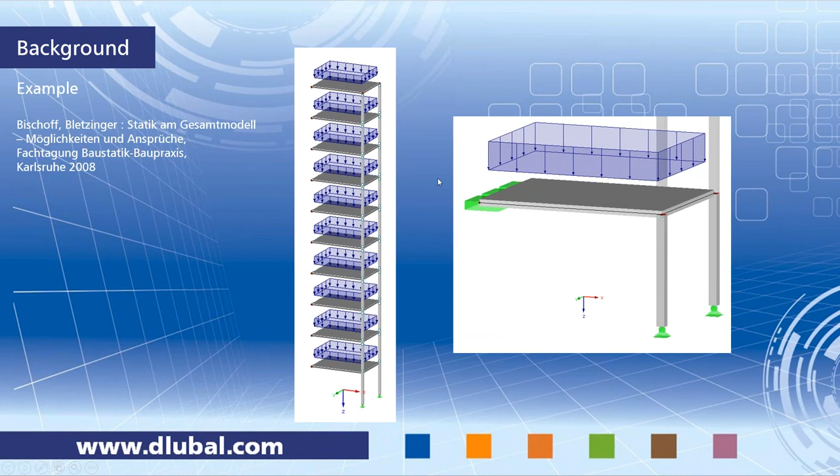If you would calculate this model in RFEM as the whole model, it will look like the left graphic, and there you can see construction stages are not taken into account. There's just one calculation for the whole building, all 10 stories calculated in just one step with all the 10 surface loads.

In the graphic of deformations you can see the deformations increasing toward the top of the building. That means minimum deformation at the bottom, maximum at the top shown in red. This is like a hang-up effect of the ceiling surfaces, an addition of deformation from bottom to top, and you'll find the maximum bending moment and maximum deformation on top.

The question is: does that calculation represent the real behavior of the build-up process, the real behavior of the structure? It's clear that the whole building with 10 stories is not built in one second or one step; it will be built story by story. So the problem is that this staged construction is not part of the whole calculation, and this leads to wrong results.

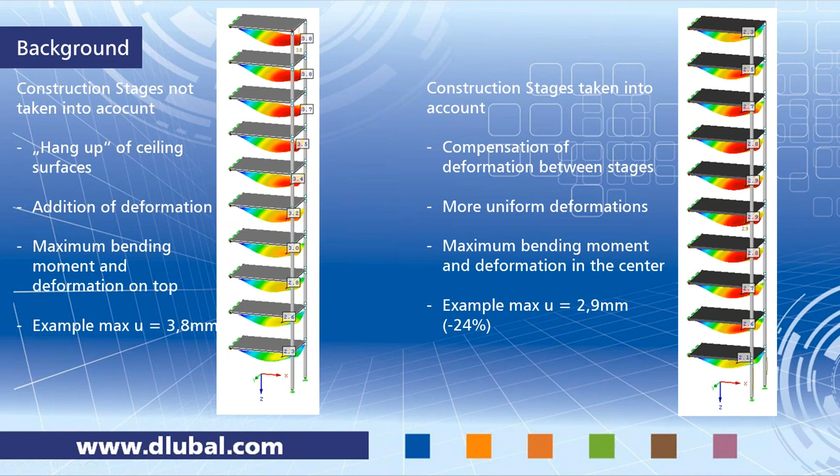So with this information about the construction stages calculation, we want to take a look at the features of RF-STAGES in the next slide. What are the features of RF-STAGES?

Of course, you can add or remove elements. As I did in the example of the high-rise building, you can add columns, surfaces, and even solid elements in several stages. You can remove them, like temporary columns, in the first stage or second, whatever. You can remove these, or you can even modify elements.

You can modify materials, hinges, and even supports.

You can also take nonlinear elements into account, meaning you can follow tension elements and compression elements. This is because the several stages are calculated by Newton-Raphson, and for a combination in a specific stage, you can use temporary loads.

That's the next point in this slide. What does it mean? For example, you have a temporary load like a crane or something in stage number 2, representing construction workers or a construction truck maybe, and you want to inspect a combination of different positions of this load. So this is what you can do with temporary loads, and these are acting only in that stage and not in a following stage.

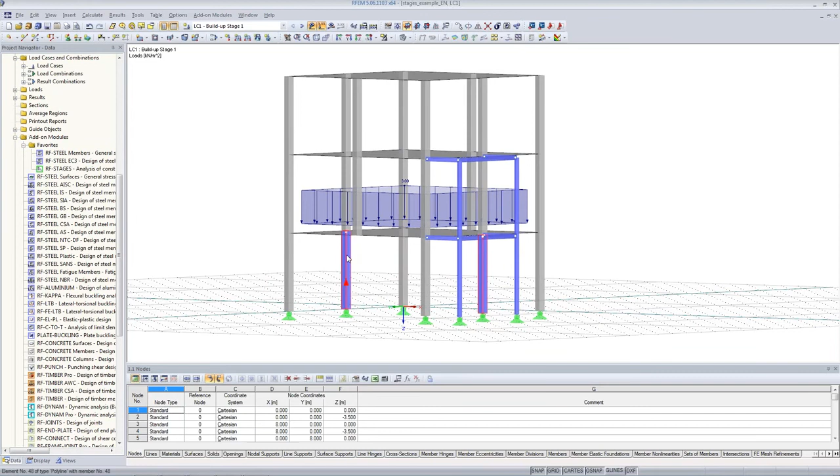So with these features, we want to move over to RFEM, where I've already created a small model for today's webinar. We have a small building, concrete and steel, with 3 surfaces, a lot of concrete columns, and also temporary columns - two steel columns and a small temporary platform.

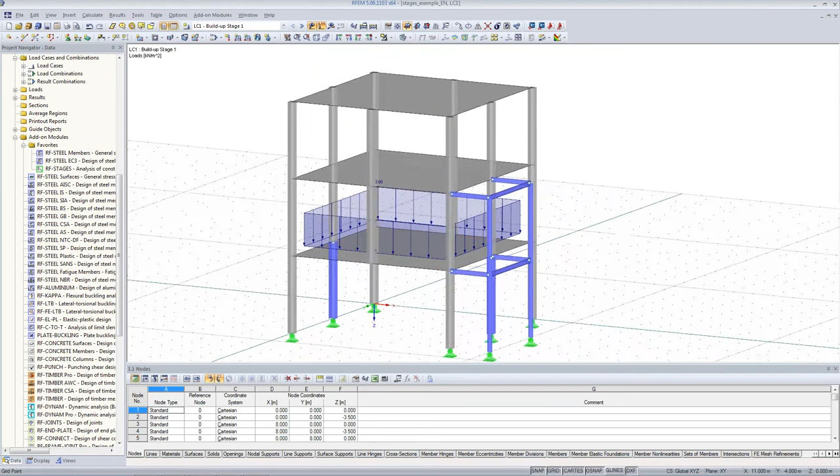I already created the load cases, meaning we have build-up loads for stage 1, stage 2, and stage 3. As you can see, it's important to split up the loads for the stages calculation. So I want to prepare 3 stages: the first stage is the bottom of the building, the next stage will be added in stage 2, and then the final stage where I want to remove the temporary frame over there.

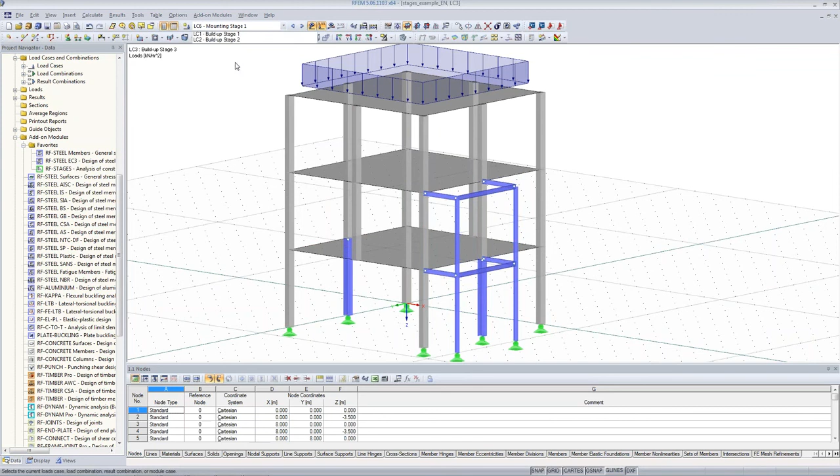In the second stage, I will already remove these two temporary columns. So it's important to split up the loads - this is built up for stage 1, stage 2, and stage 3. We also have mounting loads, which are the temporary loads on our platform.

So right now we want to start with the module RF-STAGES.

By double-clicking on this module, you will find general data, which is used to define the stages. We have 3 stages over there. You can write down a description, or you can use a template like construction stage 1, 2, and stage 3.

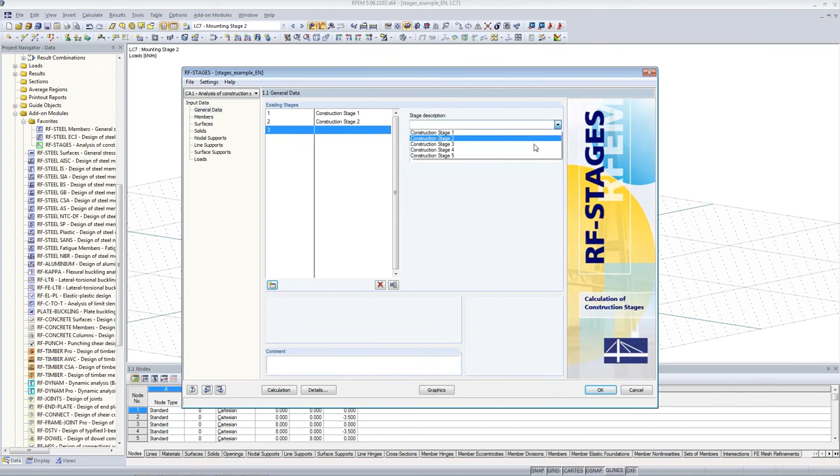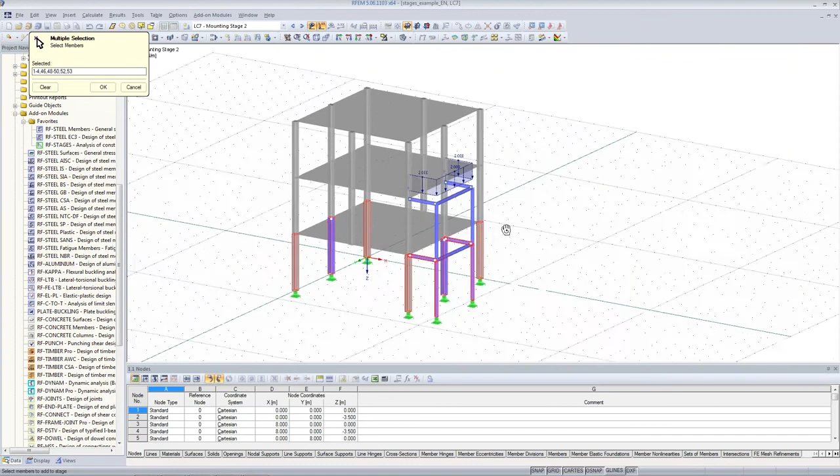Then we can go on to the members dialog, where you have to add the members which will be added, removed, or modified in the particular stage. In stage 1, of course, you cannot modify, delete, or remove something because there's no stage before stage 1. So we will start to add something, and these are all the columns, and the horizontal steel beams.

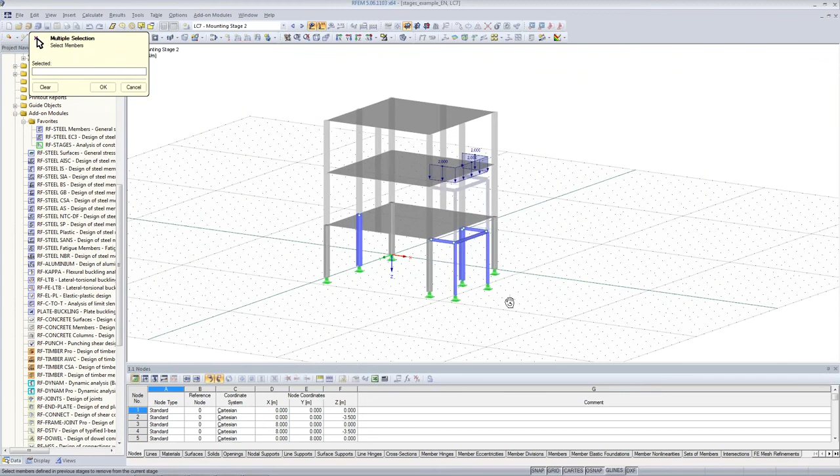In the next stage, we want to add not these columns, but these members, and we want to remove the 2 temporary columns at the bottom of the building. In the last stage, we build up the concrete columns in the 3rd floor and remove the temporary frame. As you can see in the graphic, you can follow the selection in the RFEM background. So construction stage 1, 2, and 3.

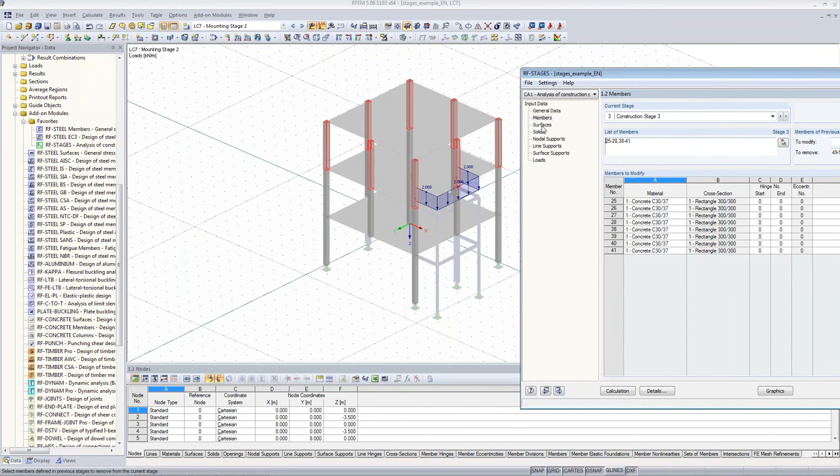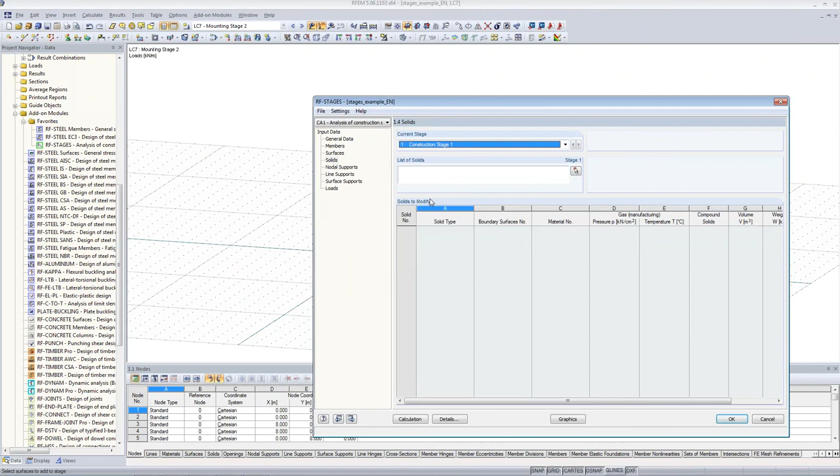Now we want to add the surfaces. That's quite easy: stage 1, surface 1; stage 2, surface number 2; and in the last stage, the roof surface. We don't have any solids in this model, so we can go on to the Nodal Supports.

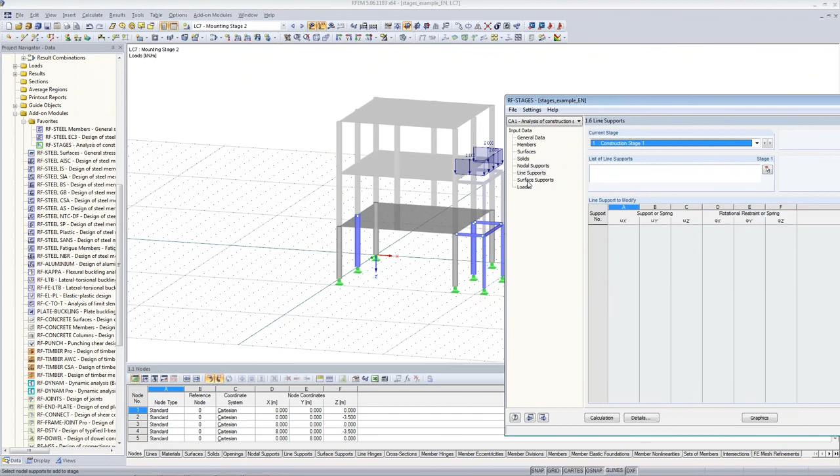We will just select all of them. We don't have to remove the Nodal Supports because the member, these intermediate temporary columns, will be removed, so there will be no load left to this one, and we can just leave it as it is for all the stages. We don't have any line supports or surface supports, so we can just go on to the loads.

In our stages, it is possible, as you can see in this mask, to add permanent or temporary loads. The permanent loads are, for example, self-weight, or any kind of load case or load combination which should be taken into account in every stage. So it is a constant load for all the stages, like build-up loads and live loads.

In this example, I created load combinations for the several stages, and you can also use load cases or load combinations, or you can even use them together. So in stage 1, I prepared load combination number 1, so I can add this. Stage 2 has its loading combination, and stage number 3 as well.

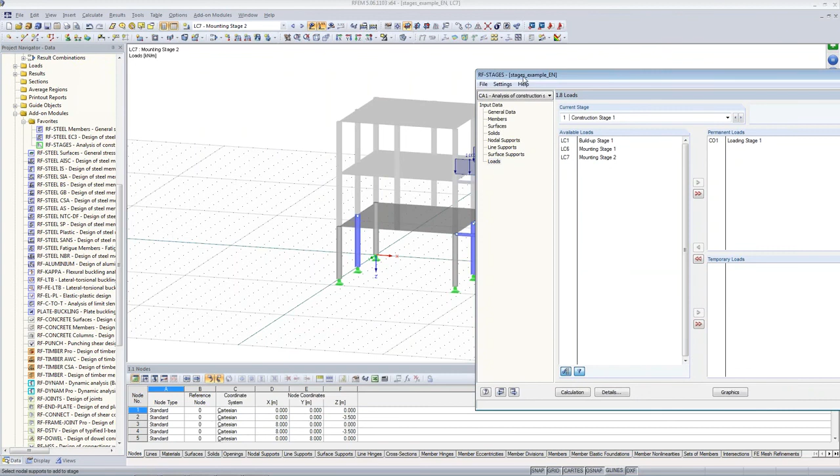What about the self-weight? Self-weight is a special type of load in RF-STAGES. You can add the self-weight as a separate load case for every stage. In this example, I could create 3 load cases of self-weight, but this is quite time-consuming.

In this combination there is no self-weight active, because we can use the 'assign self-weight to all stages' checkbox. And because I used partial safety factors in the load combinations, I want to change the factor in the self-weight to 1.35, for example.

On the lower left side, you can find the alignment of new elements, like initial position, which is exactly the same as in RFEM, or tangential position, which is the position of a new element in relation to the last stage before, which might be more important for bridge construction.

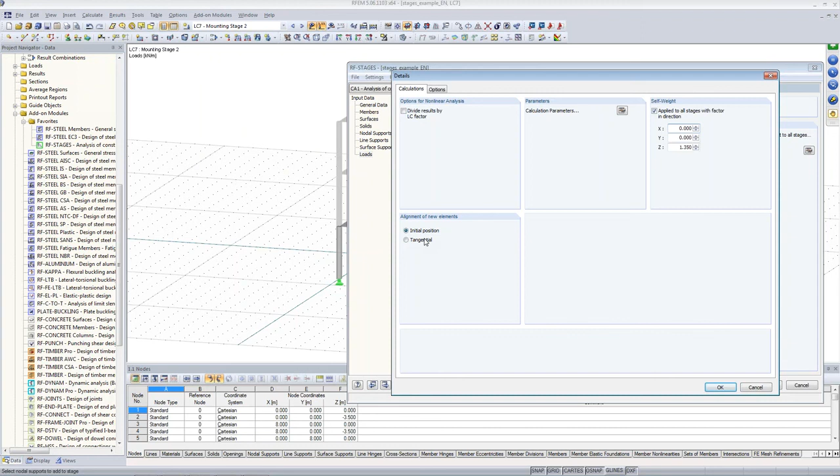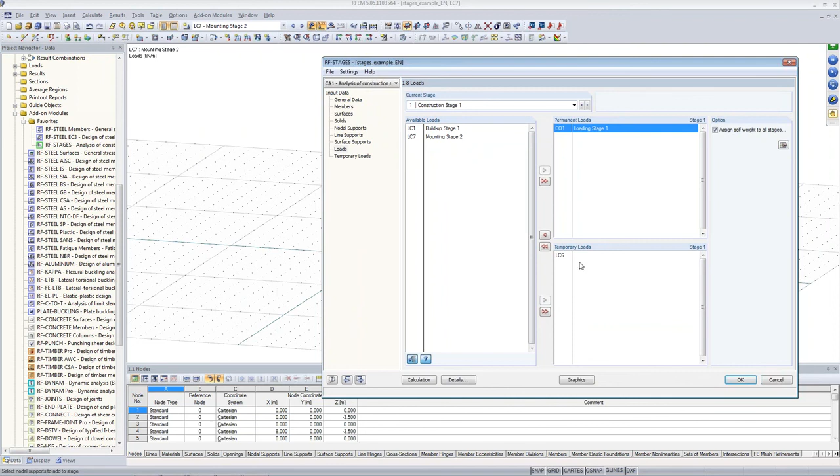What else? We have 2 mounting load cases, and these should act only in the separate load stage. So I will add load case number 6, mounting stage 1, as a temporary load case for stage 1, and mounting stage 2 as a temporary load case in the second construction stage.

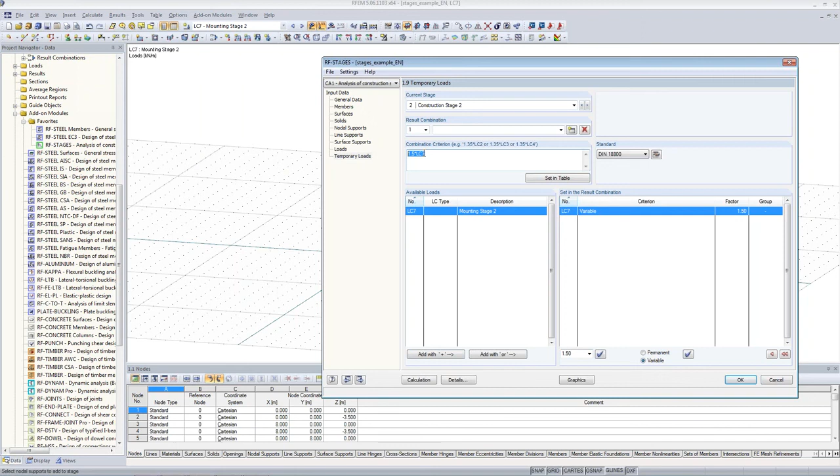To combine more than one load case, you could use temporary loads, but in our example we have just one mounting load case. So I will add it with a factor of 1.5, for example, for construction stage 1, and then the next one for stage 2, also with a factor of 1.5, load case 7.

And with these definitions, we can start the calculation. You can see that there's a separate calculation for each construction stage.

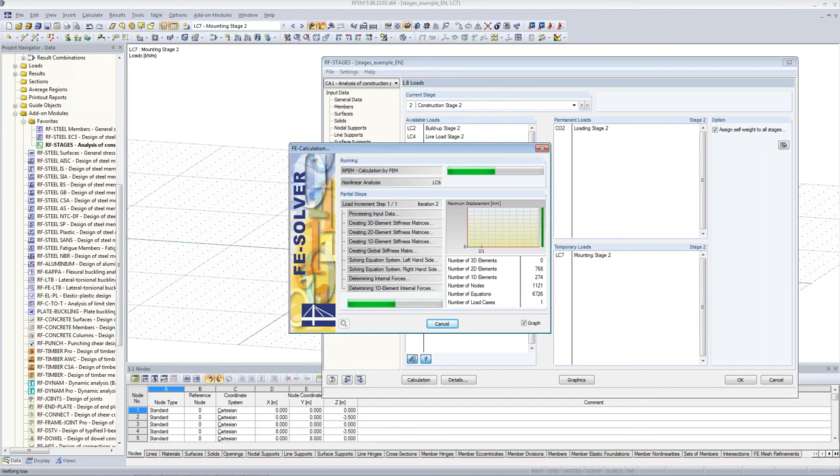After that, all these results are combined together as an envelope of all construction stages. So you can check the results in RFEM in several tables, like results or Nodal Supports, for example. Construction stage 1, you can check the temporary load cases, and an envelope of all the construction stages, including temporary.

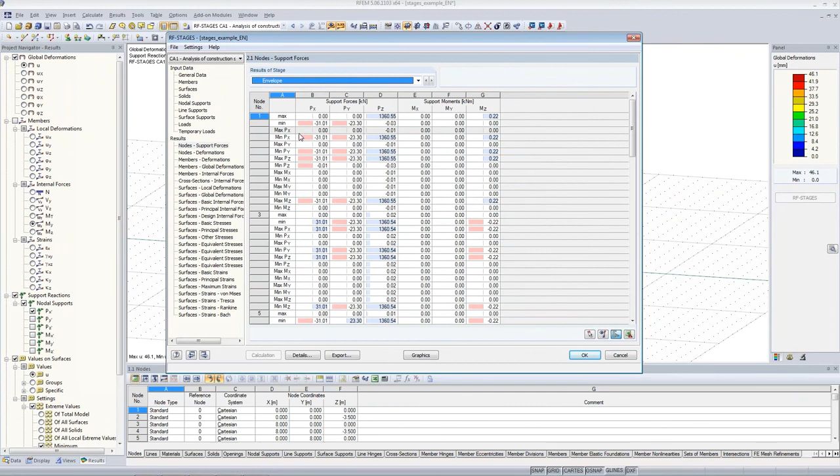Construction stages. So right now I could do just nothing with these results. I can do no design because they are just in the module, and to export them to RFEM, you can easily click on the export button, exit the module, and you will get result combinations in RFEM.

Right now we can just stay in the module and check the results in the graphic. So on the right side you'll find a panel with the envelope, or you can take a look at one PLC, which is the permanent load case, permanent loads for stage 1.

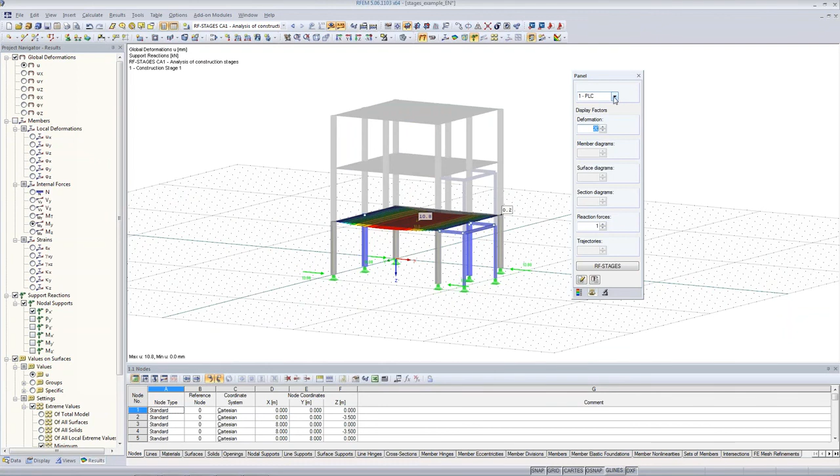We can take a closer look at the structure over there, and you can see that there was a temporary steel column, and there are no deformations over there. In the next stage, this column is removed.

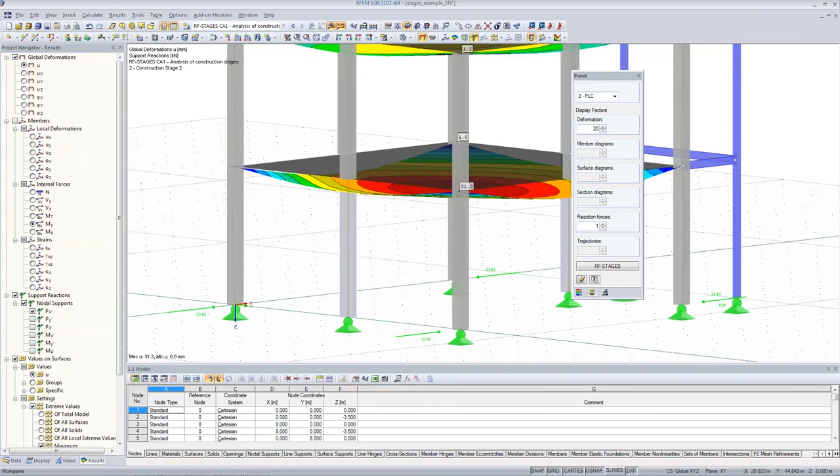It's in the background right now. You cannot select anything, and you can see a deformation which is on the ceiling in the second stage.

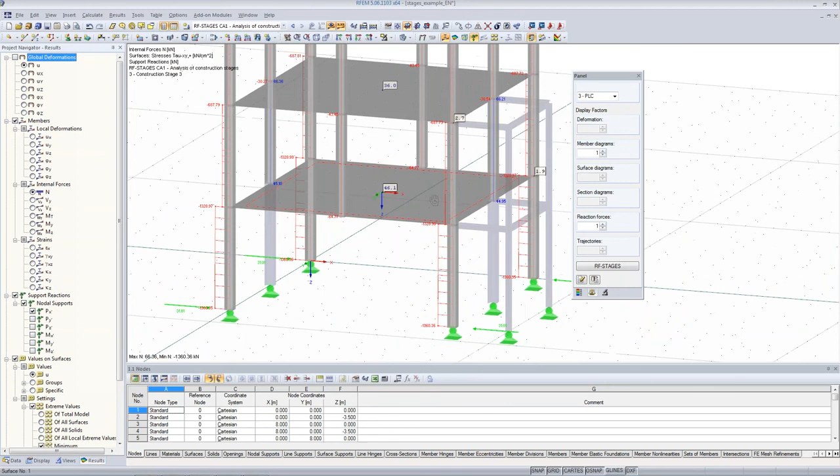You can check the normal forces in the temporary frame over there, and in the third stage you can see that also this frame is in the background. It's grayed out, so there's nothing. It's removed in the last stage, and this is like the final result, or final stage.

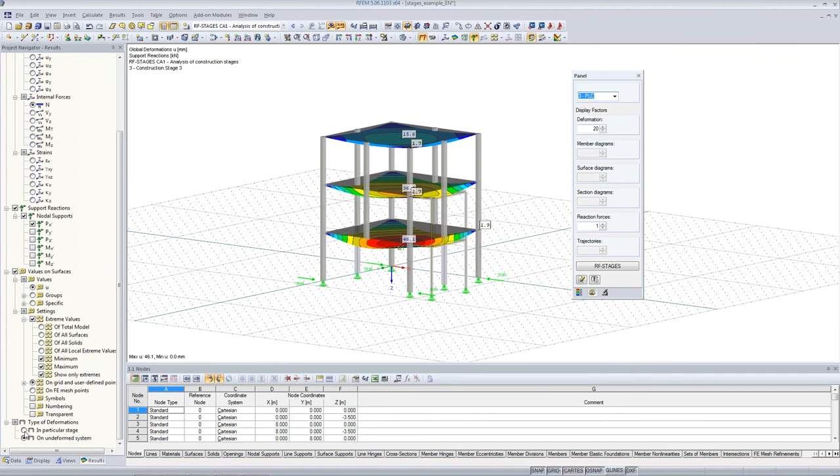I also talked about a feature to show the type of deformation, meaning an undeformed system or in the particular stage. So if I want to know how much or what size of deformation is in the last stage in the structure, I can change this option to 'in particular stage', and you can see that in the last stage you get an additional deformation of 15.6 millimeters on the structure.

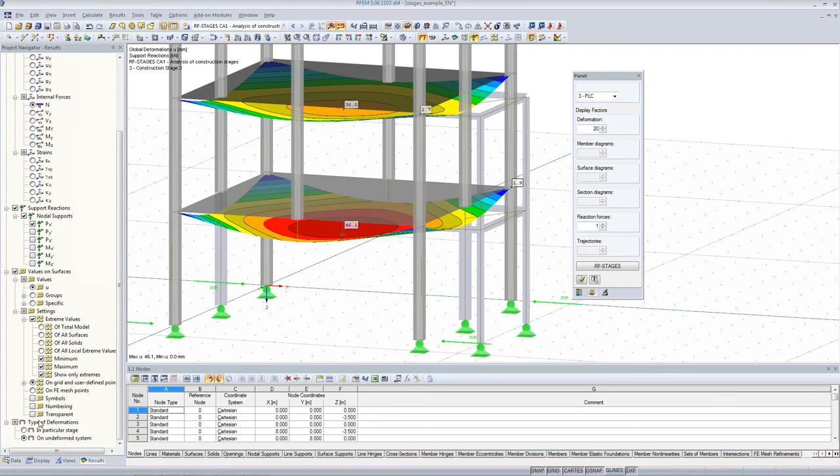And on the undeformed system it's 46.1 for the first floor. That means the total deformation of this surface is about 5 centimeters, but in the particular stage, in the last stage, it is just 15 millimeters.

Right now I can do a small design with these result combinations of our stages, for example, in the Steel Members module. And you can use these combinations over there, or you can just use the envelope to get a small elastic stress design, for example, for these columns.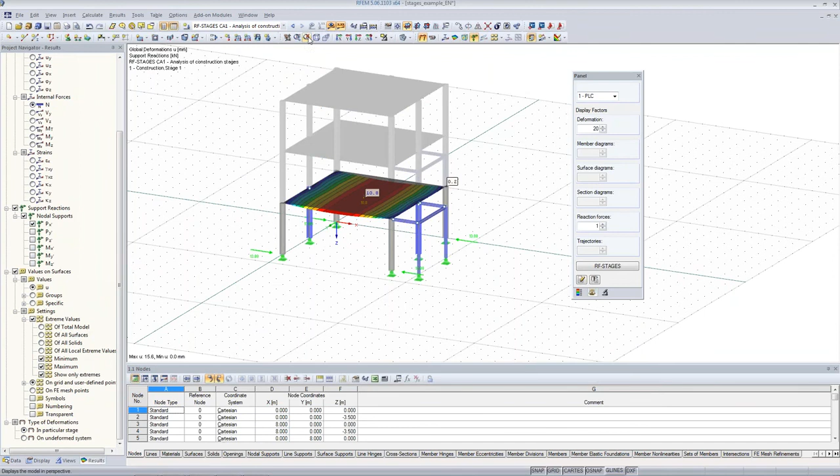So this is stages. Okay, now I can use it in our Steel Members module, and I can add these columns for design. For example, these two temporary columns, and I want to check the envelope of all the construction stages on these columns.

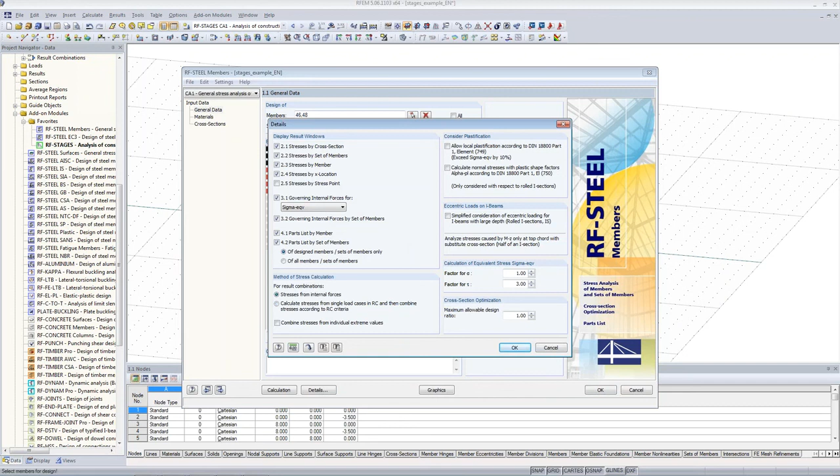Therefore, I will change the method of stress calculation for result combinations to stresses from internal forces and run the small design, and it's just about 7%.